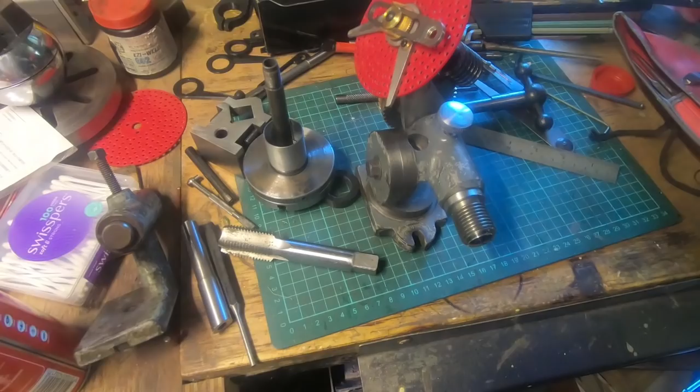There's a lot of little projects on this dividing head, and a lot of it's been covered in my Wednesday Night Live. But today I wanted to sort of go through making a thread protector for the spindle here.

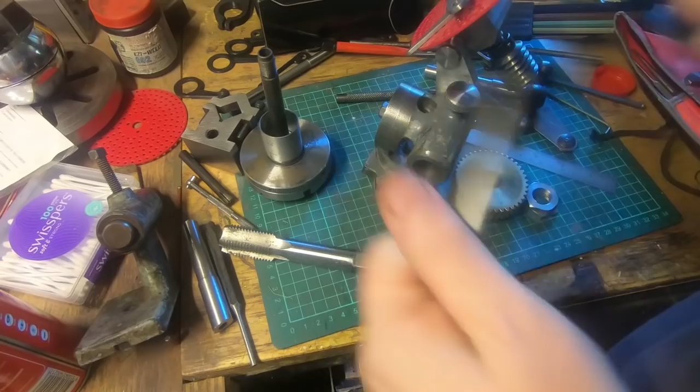We've got this sorted so we can put collets in here. This is the right angle on the end and the right diameter. We've put a key there with a flat. I don't think you can see that. You might be able to. Probably not, it's only tiny. A key with a flat on it, or alongside to go in the slot on the collet.

And we still need to put a mark on here so that we can easily get these in the right way, lined up with the collet, with the key. So that's how that works. Put that together.

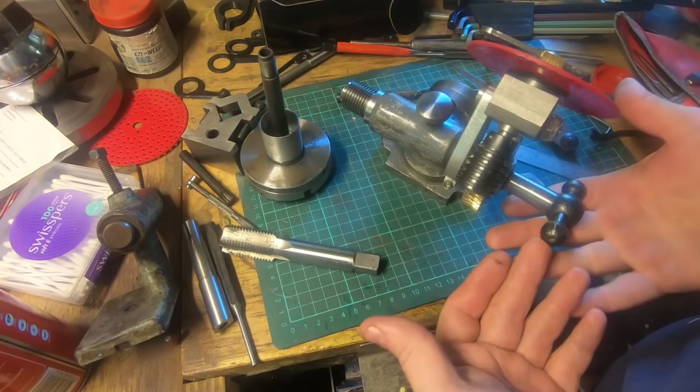There's still quite a few little jobs to do. One of them is to put a keyway in this bronze gear, and some dividing plates and the spring detent, things like that. But we've sorted this out. We've got a draw tube that works, which is a cut down lathe one. Next thing is a thread protector.

So I thought this video is probably not for everyone, but I wanted to go through some of the procedure for sorting these out in Onshape so that we're drawing it up, and some of the trials and tribulations of actually printing one that works, and then having a look at the finished one. So let's go across to the computer and have a look at the model and what I came up with, and then have a look at making up a G-code file and printing it, and what we go through to get one that actually works.

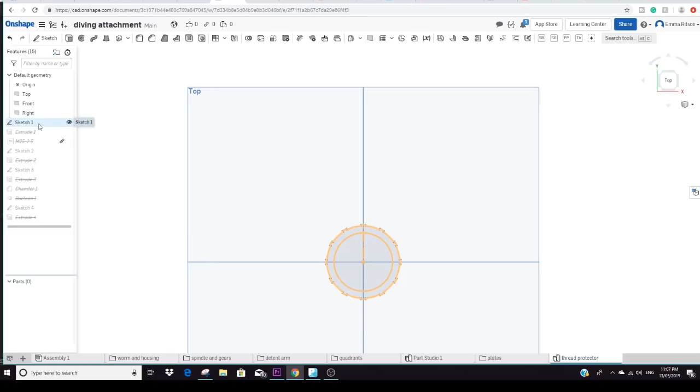So I started with a circle. It's 25mm, the same as the outside diameter of the thread, and I made a feature here, just something to get hold of with my fingers, and arrayed that round the circle. So what we've got is a double circle there, and we can extrude that. If we make that 25mm long, we've got the basic shape of what we're going to start with.

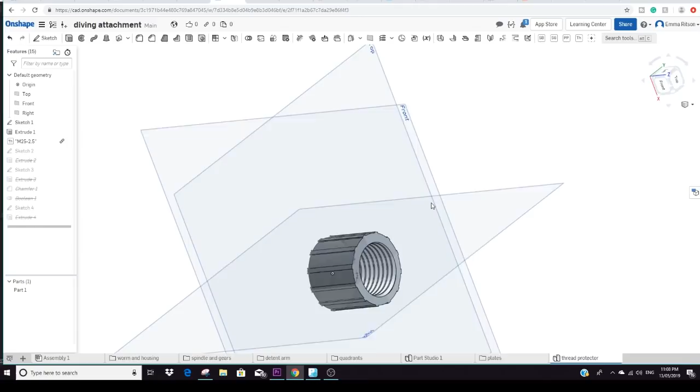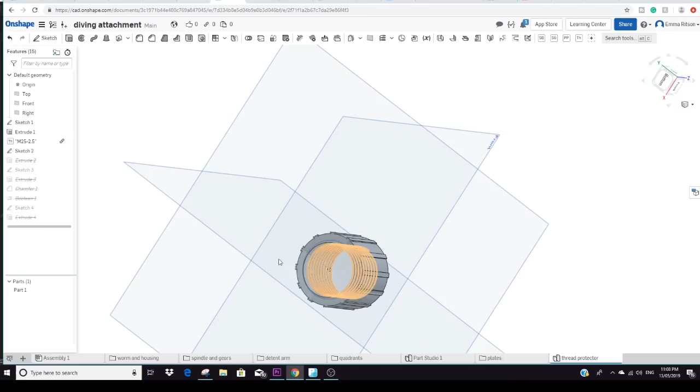Next job is to put a thread in it. It's 25 by 2.5. In a perfect world, that should screw on nicely on the spindle, but it doesn't quite, I don't think, and we'll look at that in a minute. I wanted to cut the back out, so that it screws all the way up the thread. So about 4 or 5mm out the back. If we just draw a circle and then subtract that from the thread, that should give us enough of a land there to go over the plain part on the back of the thread, especially on the lathe.

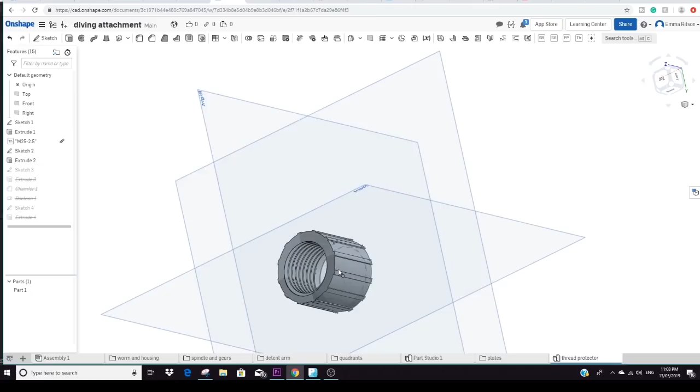I wanted to put a chamfer on the top here, and you can't really do that with this shape the way I've done this, because you've got a double diameter there. So what I've done is just drawn 2 circles, made a rough shape, a second piece there, and put a chamfer on the inside corner to match what I want to do. And if we have a look at that,

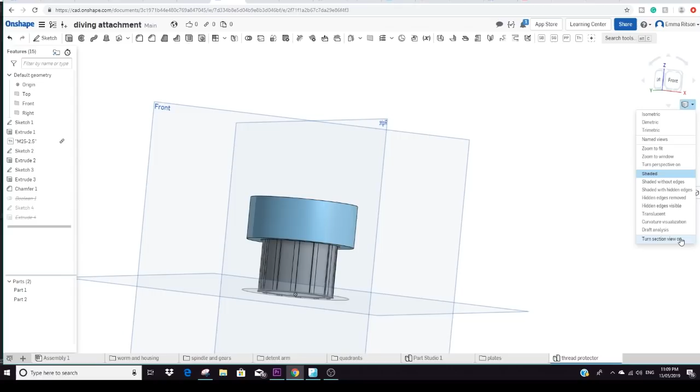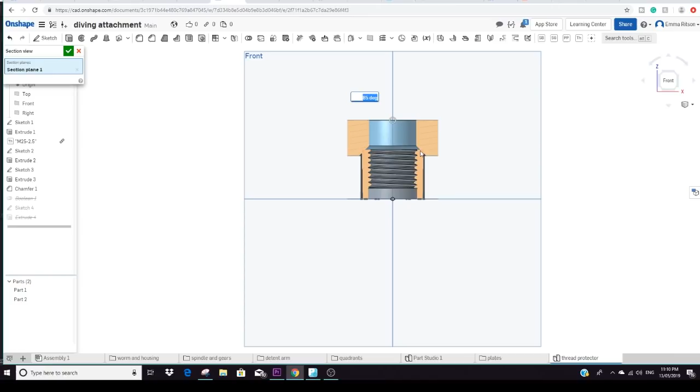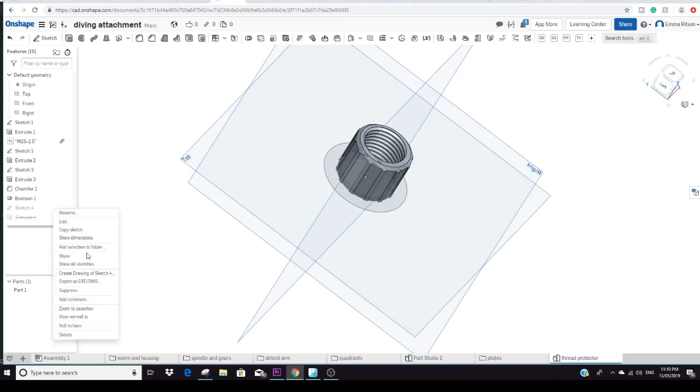we can see the overlaps there. If we take this part here from this part, then that sharp corner will disappear. So just do a subtraction there, and we end up with a nice chamfer. Still think it needs probably a rim on the outside, so I've sketched that in. Look there at that sketch. We just extrude that up a couple of millimetres too, and that'll give us our finished item.

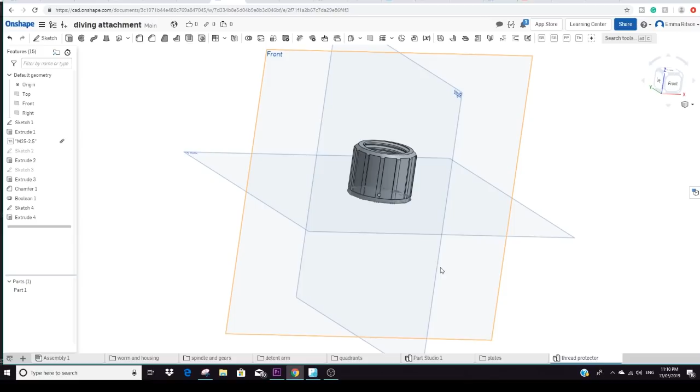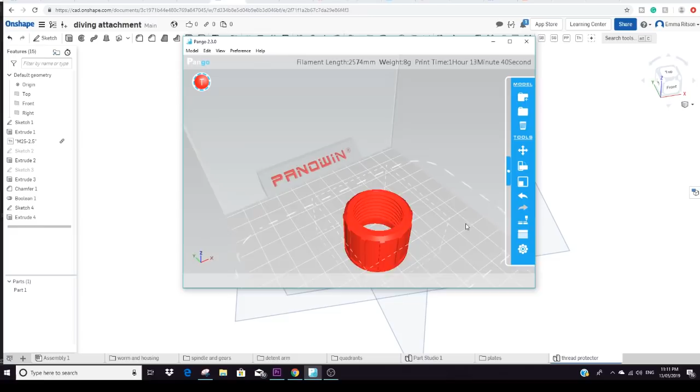If we right click down there, we can go export, name it and export it as STL and then metric to our download folder. Click OK. And then we can open it nicely in our slicer software. This is a slicer that comes with my printer, and I quite like it because I got used to it before I tried anything else. It's fairly basic, but it does seem to work, and some fancy features it doesn't do, but it's not too shabby, and it's within my learning curve, so it's what I tend to use.

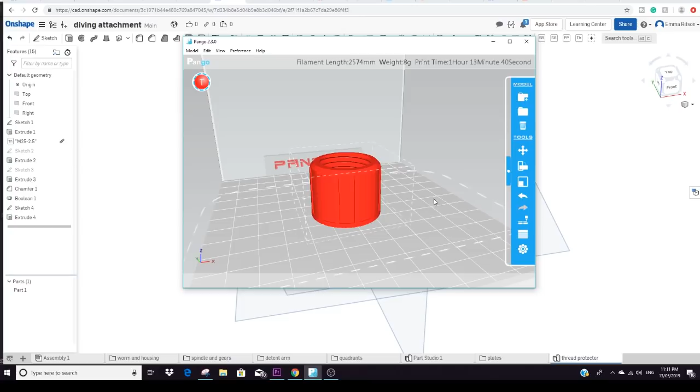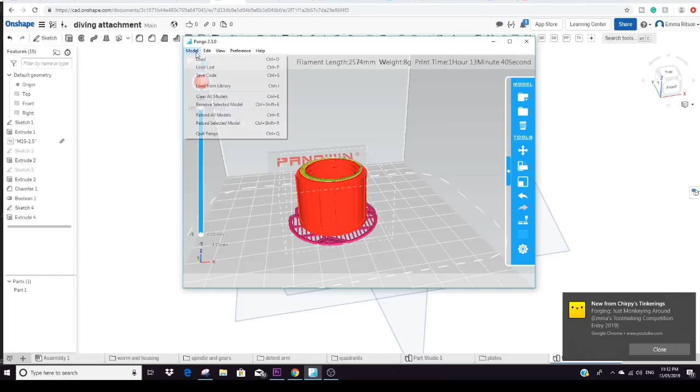I'm going to print it with a raft because I'm only printing on a black plastic sheet, and I don't know how flat it is. It seems to have put in some automatic support in the bottom there. I'm not sure why. But we can look at the print as it builds up there. This is going to take 1 hour and 13 minutes. So if we save that to an SD card and put it in the printer and see what we end up with.

I forgot to add that I've scaled that to about 0.35 of a millimetre bigger in the X and the Y direction, not in the Z direction, because that would change the pitch of the screw thread. So just in the other two directions, and hopefully, with any luck, we'll have something that will screw on.

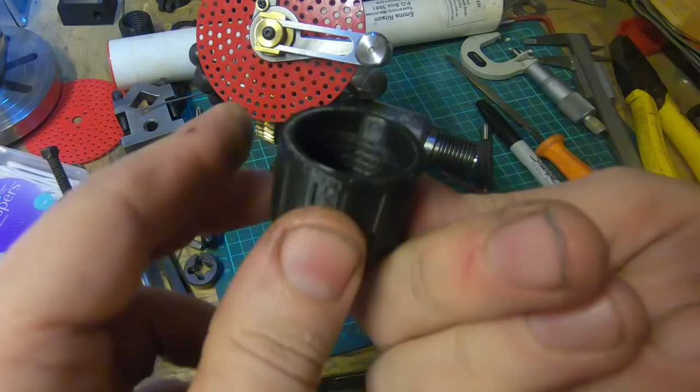So in the end, I ran a tap through there. It didn't need a lot out of it, and I was able to push it through with my hand, and sort of kept most of my skin doing so. And we've got a reasonable quality printed part. It's got the land in there, and our notches around the outside, and our chamfer on the top, and then a bevel around the bottom there just to make it look good.

And that screws on. So there's more than one way to skin a cat, and that's how I've made this. I'm quite pleased with it. It also fits the lathe quite nicely, so anyone who's been wondering when I'm going to get one for the lathe spindle, I've finally done that job. But that gives us a fairly nice, neat and quite smart thread protector for this particular build. So on to the next parts.